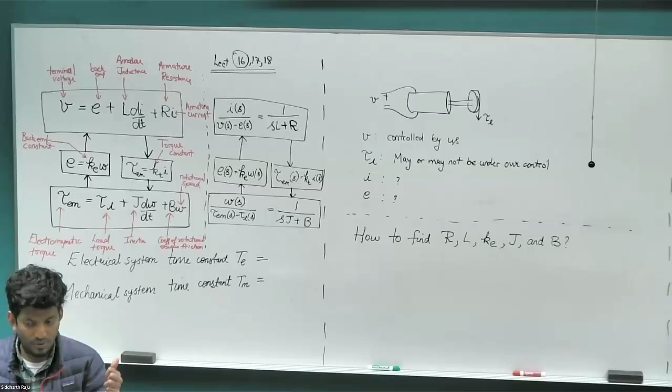So the second thing is there is a project component. We'll start the project starting next week. So we'll meet in the lab in the Keller Hall 3146. I have posted a module on Canvas. If you go to the Canvas page, there should be a new section right on the top, the project. So in this, go to the first link. So there should be the project.

If you go to the first one, meeting time, there should be a link there that you can go and select what time slots are available. Select as many as possible that you're available to meet for the next 3 weeks. Because there are quite a number of students and I want to keep it within 3 sessions. So the more slots, the easier it is to organize. So make sure you fill this in by this Friday. When you submit your homework, make sure you submit this as well. Because I need to go and decide the time slots. And then on Monday, I'll post the time slots that we'll meet at.

Okay. And I also posted another module for internship opportunities and RAs that, as they come up, I'll just let you know. If anybody is interested, just take a look at all three. The first one is particularly very enticing because it's just like a couple of hours of work a week and you get 25% coverage. They'll cover your salary, they'll cover your tuition and everything. And it's basically just helping other people do the lab.

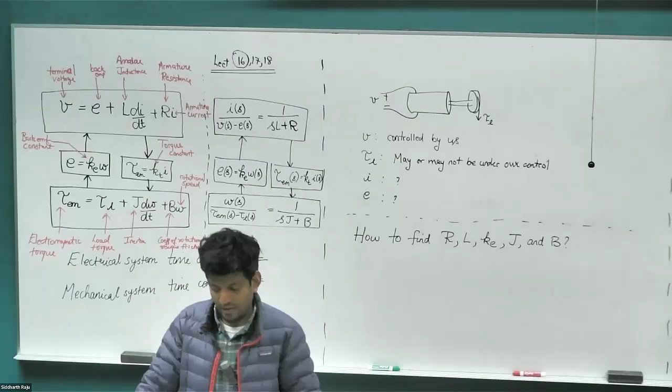With that, let's get started with today's class. So today's class, we're going to be looking at just a quick review of control systems and how we can go ahead and control our motor. And whatever we learn today, we'll be carrying it over for AC motors as well. The concept is very simple.

So before we jump into that, let's quickly just do a review of what we looked at last class. So we modeled our motor as these 4 equations. So we have our electrical system equation, we have our mechanical system equation, and then we have our electromechanical system coupling, which basically is the relationship between speed and the EMF, and then the current and the torque. Right. So we have these 4 equations, and we can represent this in transfer function form as well.

Just take the Laplace transform of this. So V(s) minus E(s) equals (sL plus R) times I(s). So that's just I(s) divided by V(s) minus E(s) equals 1 over (sL plus R). And similarly, you can get the mechanical system transfer function as well. And we can model this whole system in just this transfer function form.

So in the homework, I had asked a couple of questions. One of them is what is the time constant of the electrical system, and the other one is what is the time constant of the mechanical system.

Whenever you model any kind of system, whenever you do MATLAB simulation or any numerical simulation, one of the difficult tasks, other than building the model itself, is choosing the right solver and choosing the right step time so that your system can converge. In a very simple system like this, it's straightforward and obvious what the step time should be. But when the system gets extremely complicated, especially in nonlinear systems, depending on what step time you choose, you can get results which would look stable and correct, but might not be the actually correct results. In a linear system, that won't happen.

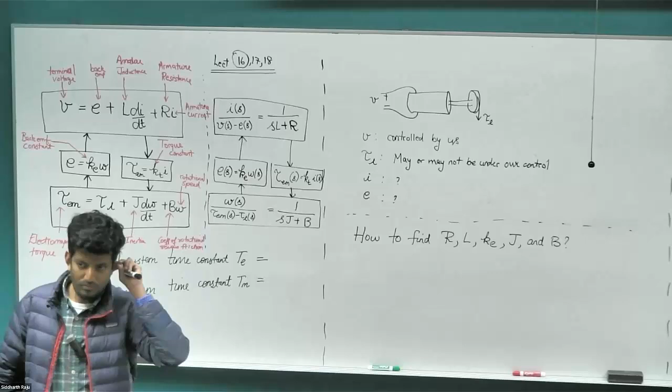From the equation that I have on the right there, what would be the time constant of the electrical system? Anybody? L over R. L over R. Thank you, Hannah. So L divided by R.

Right. So if you look at this transfer function, you can represent this as: take the R term out of the picture, take the L term out, and then you have R by L. This is equal to 1 by tau, a time constant. So our time constant of the electrical system is going to be L by R, and the time constant of the mechanical system is the same thing, J by B.

And if you remember when we had our RL network, the time constant was basically the amount of time it took to reach that 63 point some percent. So that is one time constant, and that was equal to L over R. So for a typical system, for example, in the lab motor, this is in the order of say 5 milliseconds, and this is roughly in the order of around 1 to 2 seconds.

Okay. So given these values, how do you choose your step time for your simulation? Can I choose a step time greater than 5 milliseconds? What would happen if I choose a step time greater than 5 milliseconds? It wouldn't converge. Why wouldn't it converge? Because you're sampling too slow, or you're not getting to see the full potential.

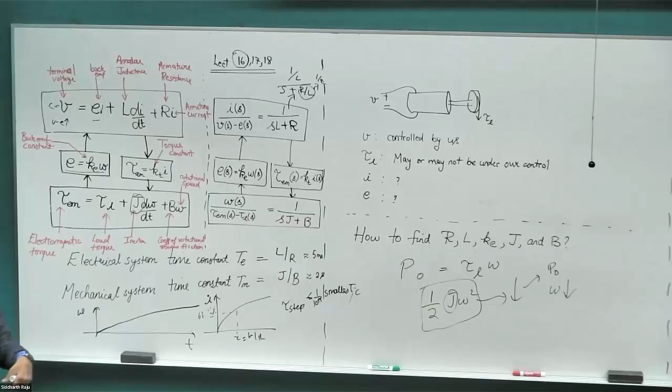Can you tell me how much the inertia energy in the magnetic field will reduce? When the load torque increases, would the energy in the magnetic field reduce or would it go up? We clearly saw the energy in the inertia goes down, right? Once it settles down, it will definitely settle down at a lower speed because of half J omega square.

What is the formula for the energy in the magnetic field? It'll go up because the current increases. Okay, so we have half L I square there. I will have to go up because of this increased load torque, which led to increased electromagnetic torque, which means I went up, which means the final energy in the magnetic field would end up being higher than what it was before. Right? Yeah.

Sure. Does the energy in the magnetic field actually matter for any reason? Do we really care about it, or is it just kind of there? In case of this DC motor, that is just there. It is not particularly useful. It does become a problem when we have that commutation sparking, because let's say we have 6 coils. 1/6 of the coil is commutating, so 1/6 of the magnetic energy would have to go out and reverse in direction, right? So from the arcing point of view, it will be a problem, but otherwise for these operations, it's not an issue. Any other questions?

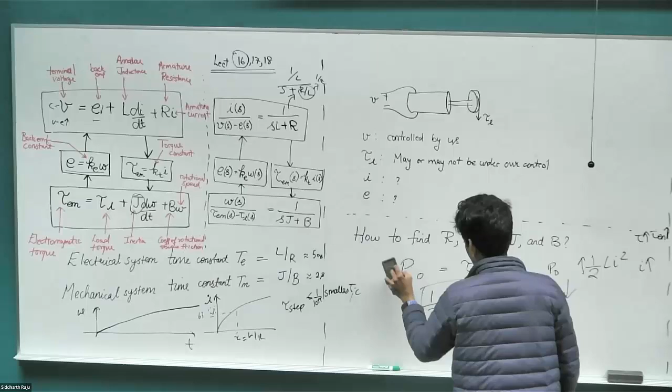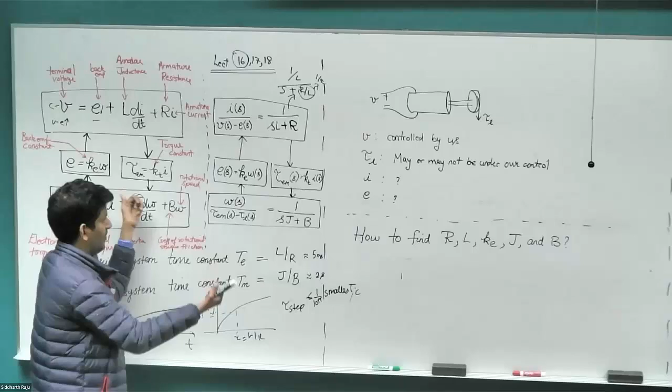Okay. So today's class, let's try and figure out how to find out all of these 5 parameters for our motor. So in our motor, we typically have control of what the output voltage, the terminal voltage is. When I mean terminal voltage, there's nothing special about it, just the terminal wires that are coming out, what voltage we can apply across it. So that's the only one element that we can control.

The other element is the load torque. It may or may not be under our control if it's connected to like an elevator or something that's typically not under our control, number of people getting in and stuff like that. But you can put a constraint of the maximum load torque that can be possible. Or in some cases, those of you who have done the lab already, you would typically clamp the rotor when doing some parameter estimation. In those cases, you can make sure that the load torque is such that it matches whatever the electromagnetic torque is. Right? So there is some variability of control. Sometimes you can, sometimes you can't. So let's say these two variables are something external that we can control for the most part.

Then the other two variables in our equation cannot be controlled. So the I and the E, these two are no longer under our control, as we saw last class or the class before that, right? So these two are uncontrolled. Right, so whenever we want to figure out these parameters, all we can control are the voltage or the load side, the torque side. And then we can only measure what the current and the EMF are.

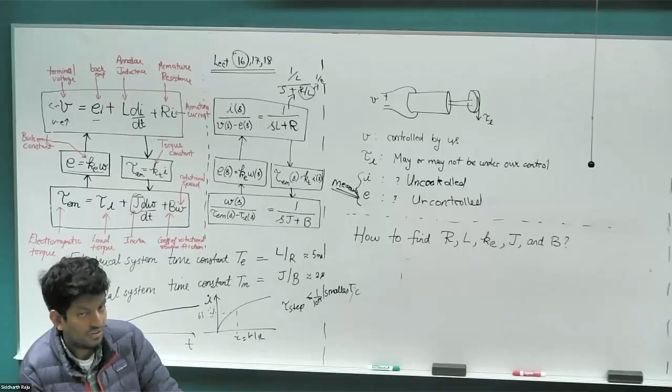And again, going back to the EMF, we can't directly measure it. What can we measure to figure out what the EMF is in a motor? EMF itself is not directly measurable, right? So what else can we measure in a motor so that we can figure out what the EMF is? EMF equals Ke times the speed. Perfect. So to know the EMF, all you need to do is measure the speed, and measuring the speed is pretty easy. So if you can measure the mechanical speed, your EMF is just Ke times the mechanical speed.

And again, this Ke term and KT term, as we derived last couple of lectures before, they are one and the same, if they are both under the same units, right? If one of them is volts per RPM and the other one is Newton meter per amps.

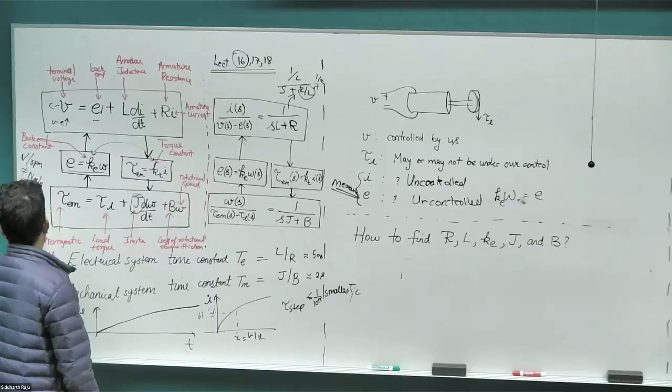So if you have volts per RPM and then the other one is Newton meter per amp, they definitely won't be equal, because the SI unit for that would be volt second per radian, right? Because this would be radians per second and this would be voltage. So volt second per radians, and then if this is Newton meter per ampere, then these would match.

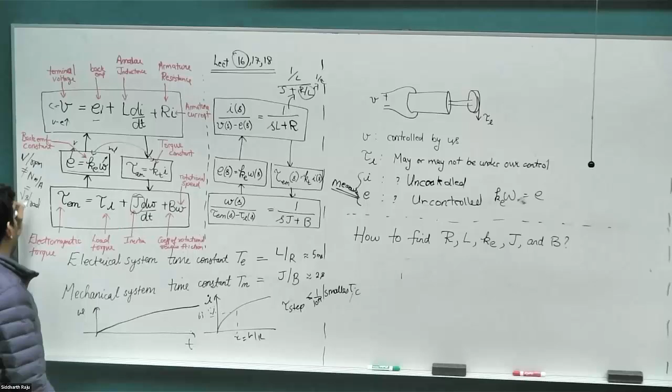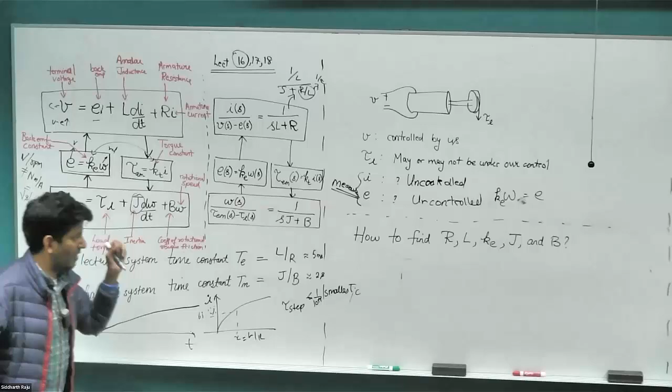Right? But typically in the data sheets, when you see Ke and KT, they would be different values, because people like to give this in terms of pounds or something, and this one in terms of Newton meter per ampere. So they're completely different unit bases. So the values might differ, but if you convert them to SI units, they would exactly match up, right? So in our course, whenever I use Ke and KT interchangeably, they mean one and the same.

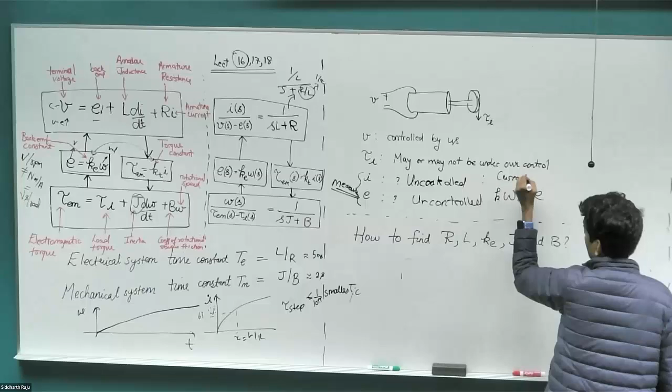It's just some K. So once we measure the speed, we can directly figure out what the EMF is going to be. Current, that is something that we can directly measure using some kind of current sensor. So this is a measurable entity as well. Okay. What is the one scenario in which I can actually figure out what the EMF is? One operating point.

KE and KT are like attributes of the motor, so will those be given to us, or is that ever something we have to calculate? It depends. So in the project, I've asked you to calculate the KE value. I give you the motor winding distribution, and then I ask you to figure out what the KE value is going to be, right? If you look at a data sheet, typically they'll give you that value. Sometimes you'll have motors that you don't have the data sheet for, or the KE value is not known correctly, right? In those cases, we'll estimate the value by doing some experiments. So depending on the situation, we can either get it from the data sheet, or we need to estimate it, or if you have the winding diagram, you can compute it, right?

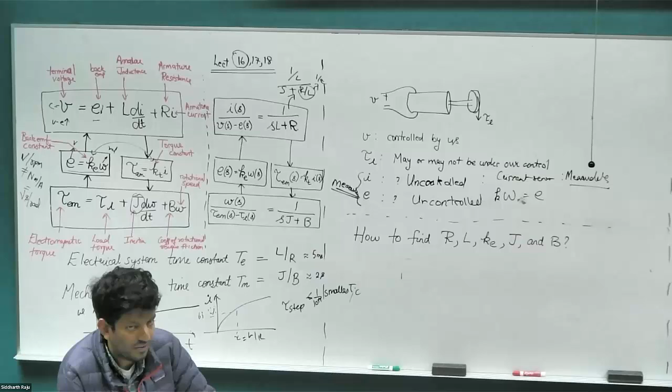All right, so what is the one situation under which I can actually measure the EMF? Is it steady state of the omega? Steady state of omega, correct? So I still can't directly measure EMF, right? Even in the steady state of omega, I take the omega value and figure out what E is. And this relationship is not a steady state relationship. If I know omega, even if the omega is changing, then the EMF will change exactly like this, right? Just scaled by some scale. So none of these equations are steady state equations.

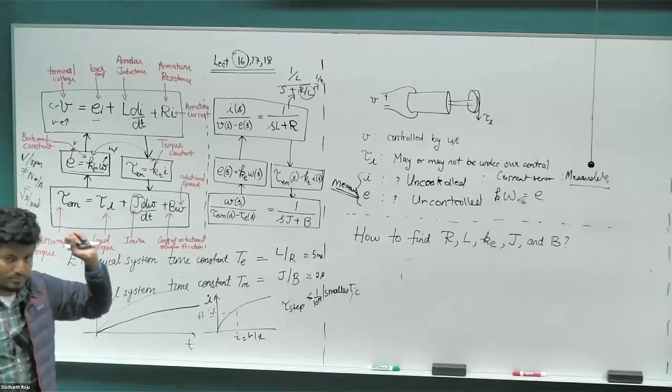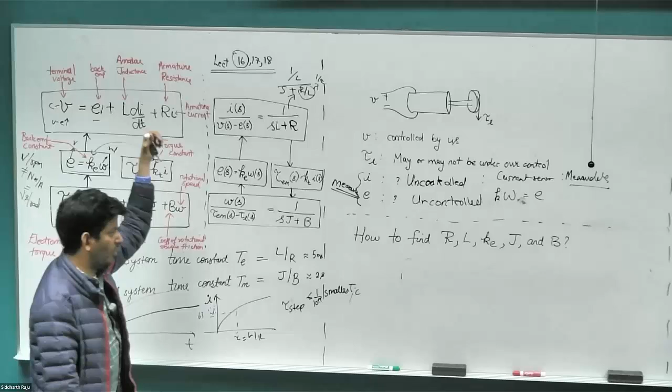There's no current. Could you measure E because it's just equal to V? Perfect. So when there is no current flowing in the system, this term is 0, this term is 0, V is directly equal to E. Right? So if I have a motor, can you give me a setup where there will be no current in a motor? But there will be a voltage across the motor?

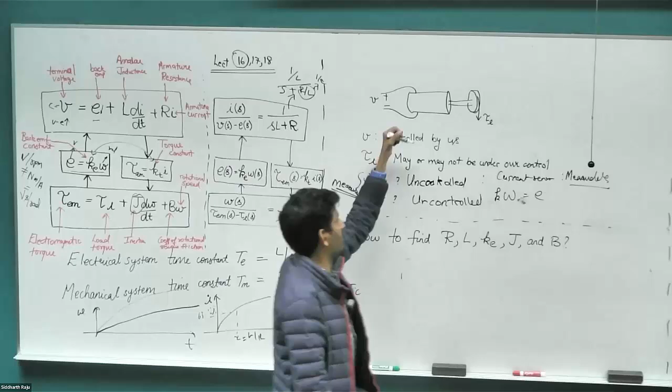Is it operating as a motor in that case? What is it operating as? A generator? Yep, it's a generator, right? If you take energy out of it, it becomes a generator, but basically you have some other system connected here. Some other motor or water, so some water flowing past some blades, creating some energy. So the system is freely rotating, and then this is going to create an EMF, right? Because it's rotating, it's going to create an EMF. That EMF is going to appear as a voltage if there is no current, if there is nothing connected to the outside world. So this is one way we can directly estimate the KE value.

So we already have our answer there for how we can figure out KE. Take your motor, connect it to another motor, and spin this other motor while keeping this terminal open. And figure out the speed at which it's rotating, measure the voltage. Your voltage divided by your omega, that is going to be your KE value. Again, for open circuit condition. Open circuit motor. So in that case, V is equal to E. So that's why we're able to make this relationship.

Right? So, all right. So now let's go ahead and estimate the rest of the parameters. Can somebody tell me how you'll estimate the resistance? You don't have to think too hard. It's a very simple answer.

Yeah, Thomas. Put the voltage on it and measure the current. Perfect. So put a voltage on it, measure the current. That's exactly what a multimeter is going to do for you. Just take a multimeter and measure what the value is going to be, and it's going to give you the resistance. There are a couple of problems with doing this method. I'll get to that in a second.

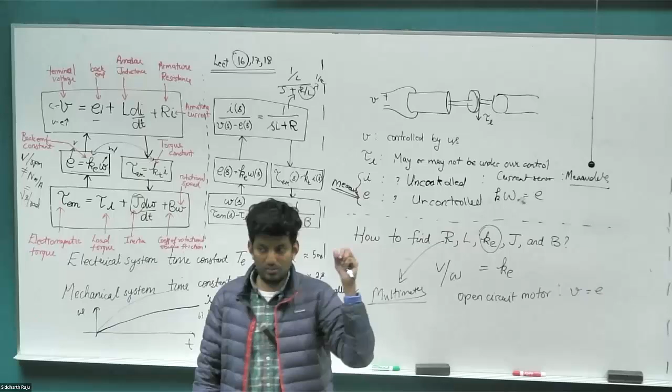But once we have the resistance, can somebody tell me how we will measure the inductance? How can you get the inductance of this circuit? Again, the answer is already on the board. Yeah, from the time constant, fantastic. What was your name again? Sorry, Olivia. Olivia.

So we already have the diagram there. We apply a step in the voltage. Let's say I apply a step voltage of 10 volts. So I have the voltage at 0, and then at time t equal to 0, it goes to 10 volts. And let's say the resistance is 1 ohm. What is going to be the steady state current? 10 amperes. So the steady state current is going to be 10 amperes.

And if I figure out where the current goes to, let's say 6.3 amperes, whatever the value comes to, 1 minus 1 by e times 100% of 10, then wherever that value comes out to, if I stop and look at the time, that is going to be equal to L by R, question mark. It may not be, as we'll see. But if that were the case, then I know already R, so I can figure out L from this value. There's a very big problem with this. Can somebody tell me what the issue is going to be?

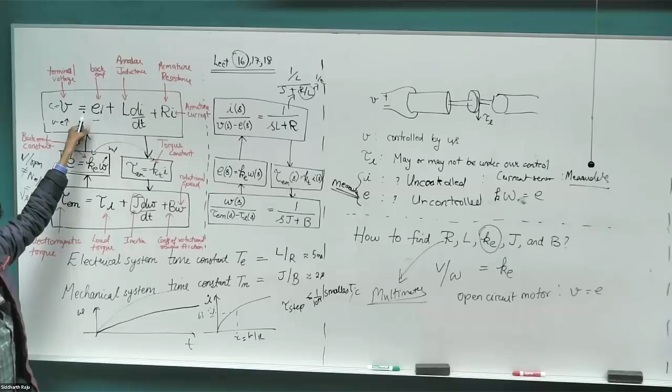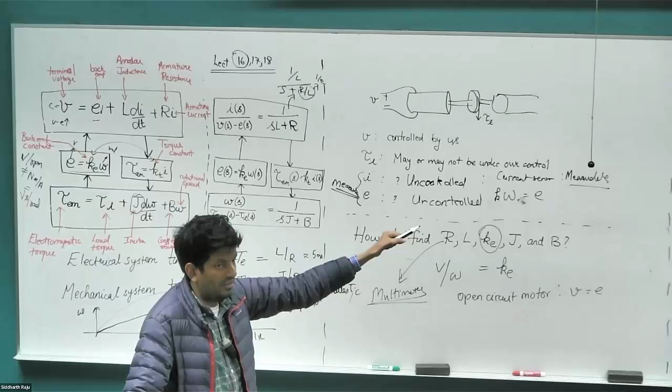It's a very good answer. But there's a mistake in that model. Going back to our equation for the diagram that I've drawn, V equals L di by dt plus Ri. It has completely ignored the EMF term E. As the current starts to increase, there is going to be acceleration because the torque is increasing, then the speed is going to increase, then the EMF term is going to creep in. So when I take a DC motor and apply a step voltage, that is not the waveform it's going to look like. Because it's not just V across an L and an R, it's V minus E across L and an R. Even though V is a constant, E is a varying term. So the picture is far more complicated than what I've drawn there.

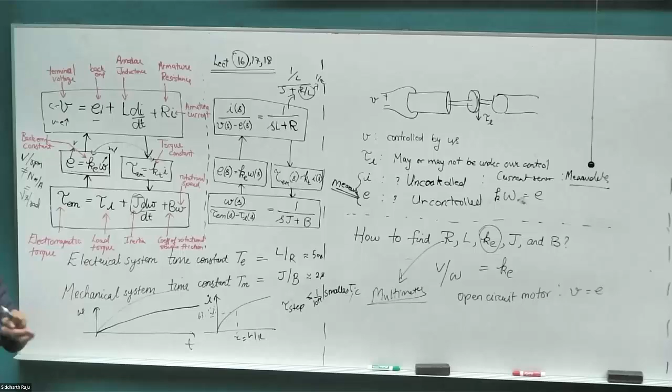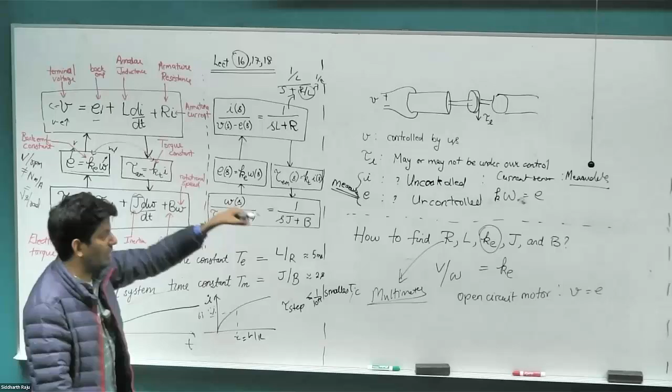But what can I do to ensure that that's the shape in which the current would look like? There's something I can do in the motor to ensure that that's how the waveform would look like. What can I do? Keeping it from spinning. Perfect. So if I somehow hold on to the rotor, I could use a mechanical clamp of some sort. If it's a small enough motor, I can hold it by hand and ensure that the rotor is not rotating. Then the EMF term can be ensured to be 0, and then that is the waveform that I'll definitely get for the current. And then I can go ahead and do all of this analysis.

So there is quite a big problem here. We are putting a constraint that the speed has to be 0, which is not always possible. If you have a very high power motor, you cannot typically put a clamp on the motor. It will rip the clamp apart if you try to hold it by hand. I don't want to see what's going to happen. So it's not always a feasible solution. So what else can we do? How else can we estimate the inductance in the case where we cannot clamp the motor so that the speed remains 0? What else can we do?

When I introduced this diagram in the third or fourth lecture, I gave another interpretation for time constant. Does anybody remember what was the other interpretation for time constant? So if the current were to rise at the same speed, at time t equal to 0, let's say it started to rise.

And if it continued to rise at the same linear speed at which it started off rising... because of the resistance component, it starts to kind of narrow down. But if it was just a purely inductive network, this would have kept on increasing forever, right? And the time it would have taken to reach the steady state value in this inductive resistive network is the value of the time constant, right?

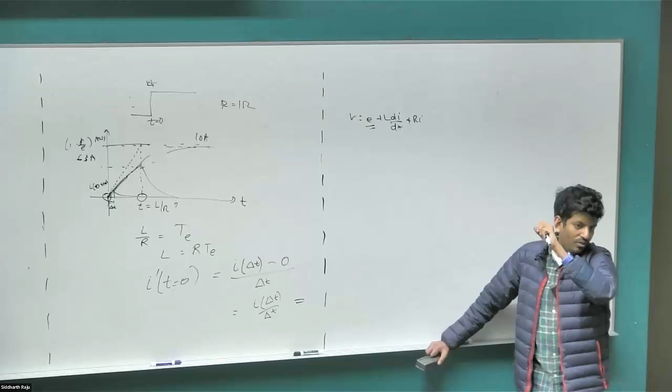Go back to our electrical system equation, right? So we have V equal to E plus L di by dt plus Ri. In our current setup, what is the value of E? 0. So this term goes away. What is the value of Ri going to be? Approximately, what is it going to be? 0. Because the current is again very small.

The current is very small and the delta T is very small. So the division of small current and small delta T becomes appreciably large. But the current magnitude itself is quite small. So this term is negligibly 0. So what is the slope? That is di by dt. If delta T tends to 0, the limit becomes the differential. Right? So our slope is equal to V divided by L.

We know what voltage we applied. We applied 10 volts. We know what di by dt is from our measurement. Then we can get the inductance L. L equal to V divided by di by dt. Right? So we could have looked at the same thing the other way around as well.

From our definition, we said our time constant is equal to the time it takes for the slope to reach the steady state value. So let's say it takes some time t. If I multiply this time t by whatever slope I got, which is I of delta t divided by delta t, that must be equal to whatever the steady state current would have been. And what was the steady state current? That was equal to V divided by R. And what is my time constant? It's L divided by R. R cancels, we get the same formula again, however you look at it. Again, this term tends towards di by dt as delta t tends towards 0.

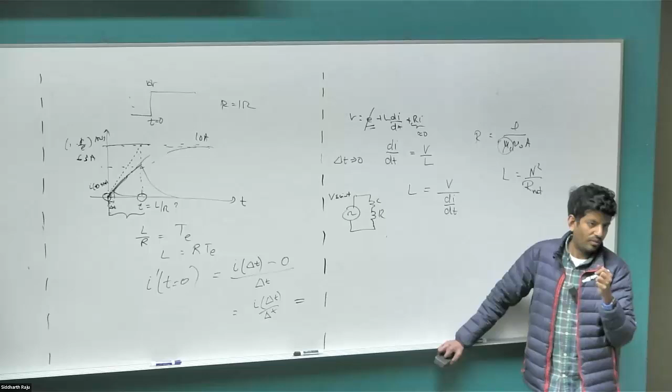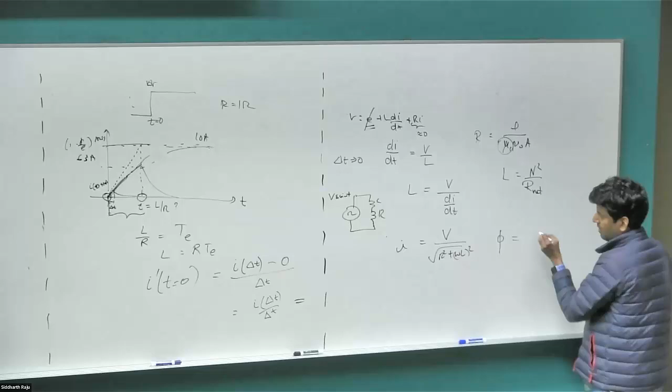Pretty straightforward. So we just have our current magnitude is going to be V magnitude divided by square root of R square plus omega L square. And the angle of the current is going to be tan inverse of omega L by R. This expression is also something that we have seen before when we did our phasor analysis. Right? So now what we can do is we apply some sinusoidal voltage. In our current measurement, we need to make two readings. One is the time at which the current goes to 0 compared to when the voltage was 0. And what would that give us? That would give the phase angle.

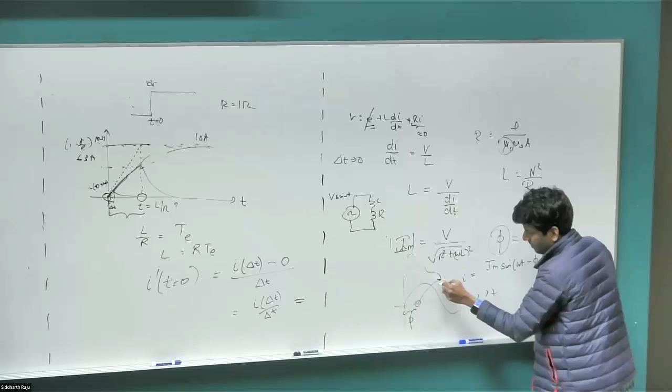Right? Because if this is V sine omega t, then the current is just V divided by whatever this impedance is. So let me call this I magnitude. Right? So magnitude Im sine of omega t minus phi. So it's just going to be phase lagging, assuming time in this direction. And the magnitude itself is this value that I have here. So all I have to do is look at the current measurement, see where it crossed the 0 compared to the voltage crossing, and then see what the magnitude of this is. I have two values and two unknowns, L and R. I can solve two variables, pretty straightforward, right? So I don't need to know resistance. If I inject sinusoidal voltage and measure the sinusoidal current, I can figure out what the R and L values are. There is absolutely no problem putting a sinusoidal voltage into a DC motor, as we'll see when we do the lab experiment. Right?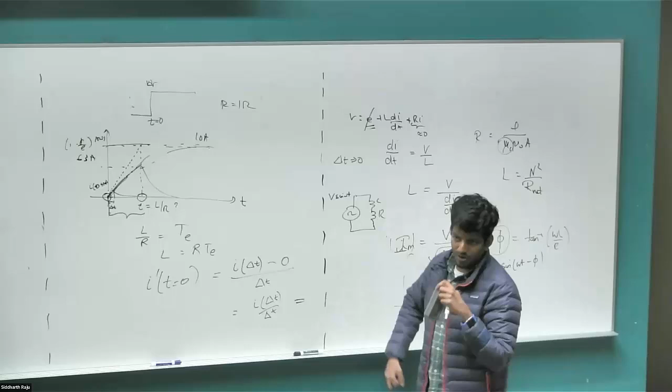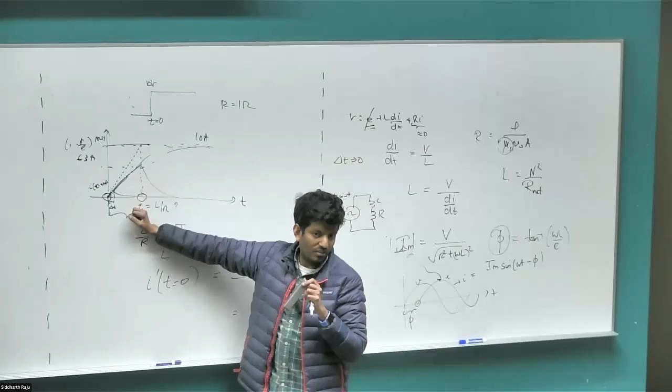But what is the problem with this? When Olivia gave the answer that we wait for one time constant and look at what the current is, what was the problem with that? Why did we do this tiny di by dt term instead of using the time constant method? EMF is not 0. EMF is not 0 because the motor would start spinning. We would have the same problem here. Right? If we apply some sinusoidal voltage, you'll see the speed will go sinusoidally as well. Right? But what can I do to address that?

I don't want to make the voltage too small because the current would be too small. Then I can't differentiate between the peak and the 0 crossing. The measurement will all get pretty bad because of the noise that we have. So what else can I do? I want to keep the sinusoidal thing because I can get both pieces of information, but I don't want the rotor to rotate.

So try to get an intuitive feel for what's going on here. When we did our first power electronics course, the review, I showed you the lamp blinking experiment. You saw the blinking only up to a certain frequency. Once I went to very high frequency, you completely stop seeing the blinking. I can do the same thing here. If I make this voltage frequency extremely large, then the motor cannot see the variation in the voltage. For it, it's just going to look like an average value.

What is the average of that sine wave? 0. So if I take this voltage but make the frequency extremely large, then during the first half, the motor will try to spin in the positive direction. Next half, it will rotate in the negative. But it happens so fast that it will just wiggle around in the same place. We'll see that in the lab, it won't effectively rotate to create a high enough speed that the EMF starts to interfere. So we can still treat this as an RL network.

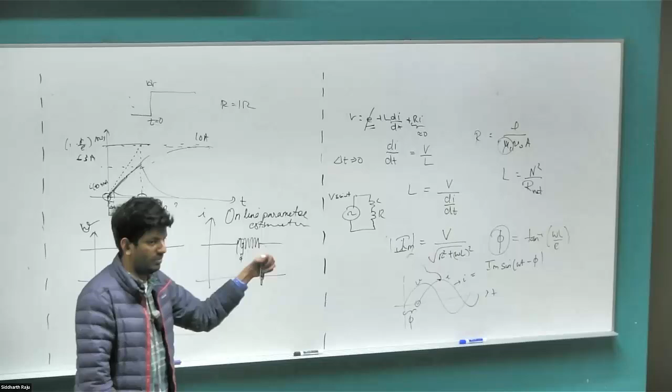In the lab, we don't do this, but for most of the motors deployed in the industry, at least for high performance, they do this. In electric vehicles and similar applications, they inject high frequency components so that the inductance and the resistance are updated continuously so that you can tune your controller. When we look at how to tune the controller, we'll see that the performance is closely linked to what the R and L values are. If you assume some R and L and the value changes over time and you still have the same old controller, your performance will start to deteriorate. So you want to keep updating it online. We have this advantage when we inject this high frequency component.

Anybody got any questions?

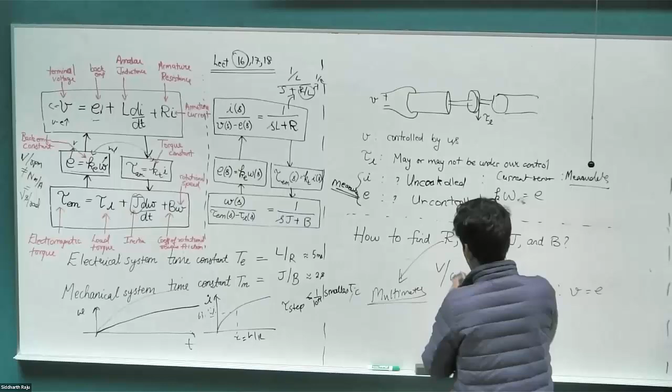Right. So let's go back. We have already seen how to figure out R. We have seen L, we have seen K. Let's look at J and B. Can you tell me how we can figure out B? Let's again not worry about the online estimation method. For mechanical, it gets a little bit trickier for online estimation.

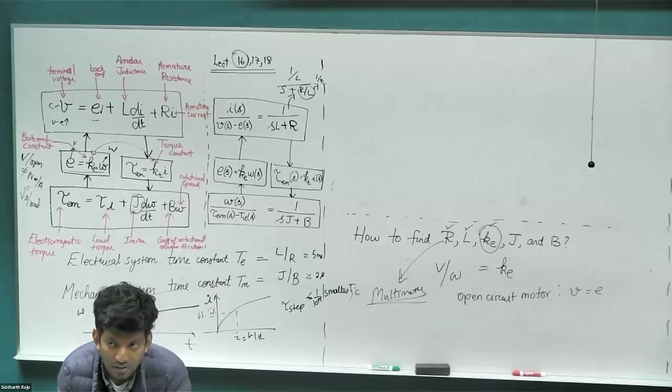Yep, exactly. Yeah, but for that I need to know J and the time constant, right? I don't know either of it. I don't know this term, I don't know this term. Let's say I want to start off with measuring just what B alone is. Once I know B, then I can use the time constant method to figure out what J is. How do we figure out B?

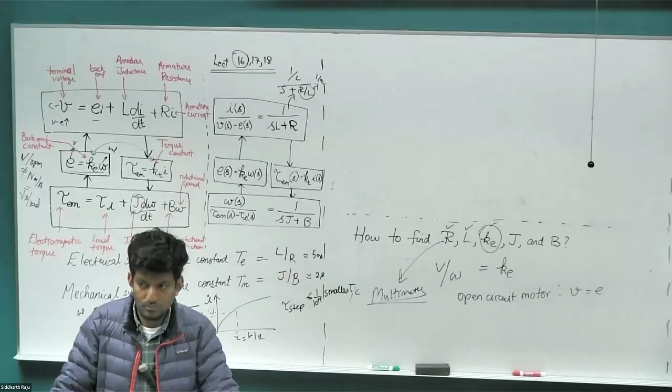Well, we can apply different voltages to the motor. It's going to cause different currents. Take a reading of the currents. Then we know what the electromagnetic torque is. Let's assume we are not applying any load torque. We are not loading this motor at all. We are letting it spin freely. The motor is not coupled to anything else. It's just going to rotate freely.

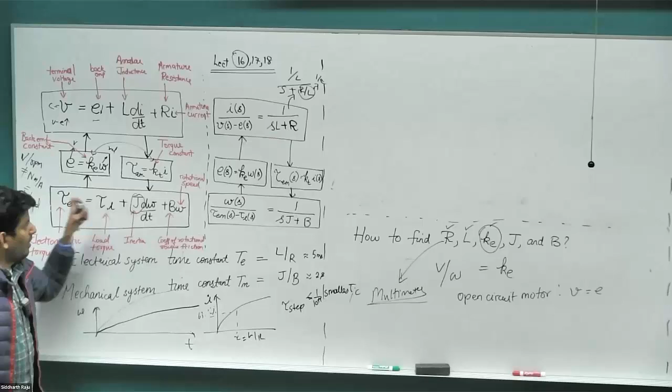What is going to be at steady state? This term is going to go to 0. So our electromagnetic torque is directly equal to B omega. Our electromagnetic torque itself was directly equal to the current times the KT. So I apply some V, let it reach steady state, and then measure current.

Once I have current, our electromagnetic torque is equal to KT times I, and this must be equal to, at steady state, well, the load torque term, which is 0, we are not putting any load torque. This is our intentional design. And J d omega by dt. This term is 0 at steady state. That is the definition of DC steady state. All the differential terms go to 0. Only the term that remains is B omega.

So for B, we can again measure omega. It's just KT times I divided by omega. So with that, we have our frictional coefficient B in our motor. How do we estimate J? So, Zach already gave the answer: if we know the time constant, and we know B now, we can get J.

Now the question is, how do we get the mechanical time constant? What can we do? Go to 10 amp steady state and go to 0 amp with a step. Perfect. So we can start off at a known current. We can do the reverse of that 1 by SJ plus B thing. So let's say we are running at some constant speed. We are already putting some torque.

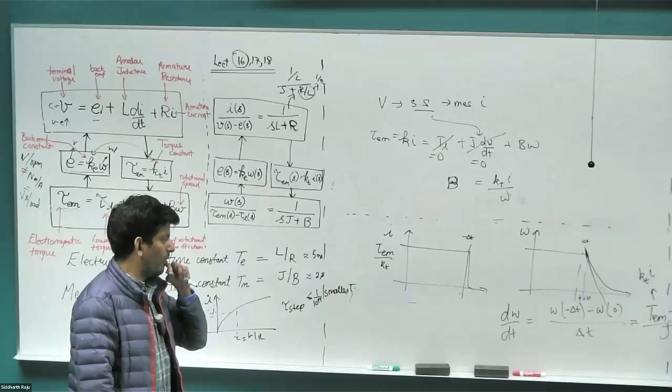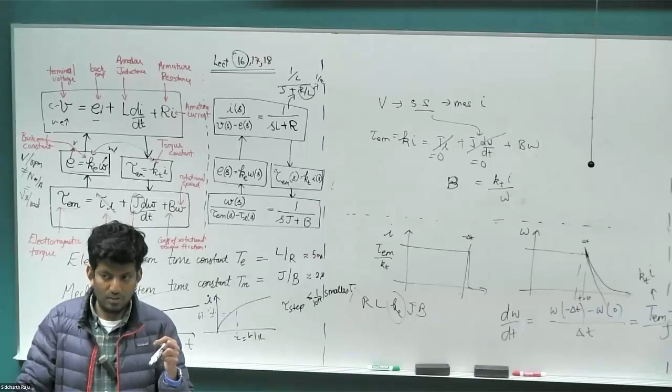Right? So this is how you'd end up estimating all the 5 parameters. So here I estimated R, L, K, J, and B. How do I estimate KT? Do I need to estimate KT? No, right? Because K is already known, K and KT are the same. Okay. Any questions so far on how we estimate the motor parameters?

Why do we need to do it that way where it's like on and then we turn it off? Like why couldn't we just apply a current spike? Oh, we can. So the problem with applying the current spike is the electrical system keeps changing with the mechanical system. Right? And in the previous case, we can assume that the mechanical system can't catch up with the electrical system. So the mechanical system didn't interfere with the electrical model. But the electrical system actually operates way faster than the mechanical system. So we can't do the reverse assumption.

So if our electrical system is changing, we cannot ignore those changes when we analyze the mechanical system. So we need to ensure that the current in the electrical system has gone to 0. Right? Before we can do this analysis. As soon as I turn off the voltage, the current wouldn't go zero like this, right? Because we have inductance there. But it goes to zero extremely fast compared to the mechanical system that I can more or less assume this to be a straight vertical drop. And then once this electrical system is out of the picture, then I can start analyzing the mechanical system as if it's the only system available.

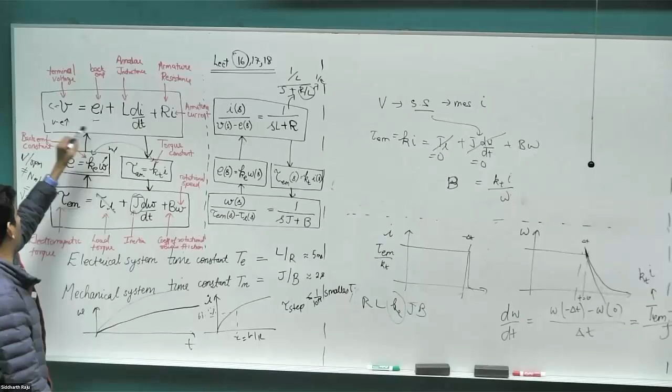All right, but I can't do that analysis when the current is increasing on the turn on time, right? Because the current is gradually building up, all of these terms are varying. So this is definitely interacting with the system at that point, right? Okay, any other questions?

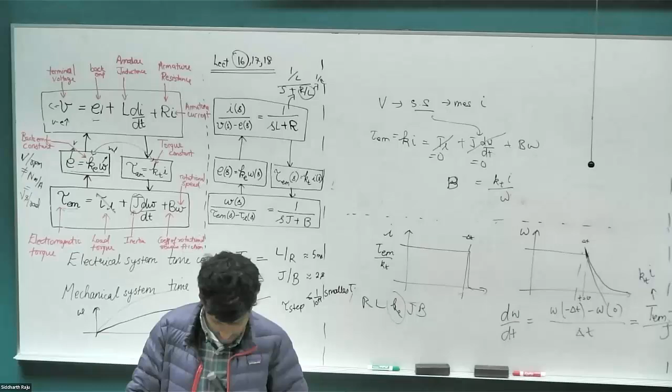Okay, so with that, let's look at a couple of examples on how to design a controller in the frequency domain. So what we have is, we have our motor. The load torque of the motor is controlled by some other external thing that we have no say over. If it is a generator, it's the opposite, right? So let me draw what we can control. We can control the voltage of the motor and the load torque is whatever it is. If it is a generator, it's the opposite. We control the torque going into the generator and the voltage is whatever it comes out to be.

Right? We will then have some kind of closed loop control to figure out whether the voltage is the correct value that you want it to be, and then adjust some prime mover mechanism to adjust the torque and so on. But let's consider just the motor case where we control the voltage, load torque is whatever it is, and the motor goes and settles to some speed, omega. Now we already saw a bunch of problems. As we start to increase the load torque, even for a given voltage, the omega starts to change. And then the motor parameters change, as the motor heats up, as the current increases, core saturates, and then we haven't even looked at the B and the J terms changing, right?

B term can change. Let's say you have some kind of liquid, a non-Newtonian fluid that you're mixing, or let's make it simple. Let's say you have a cement mixer. As the cement thickens, the friction of the fluid starts to increase. So we can have mechanical systems where B actively changes as the system operates. Can somebody give me an example where J, inertia, will change as the system keeps operating? Yep. If the radius of whatever the load is changes. All right, can you give me an example?

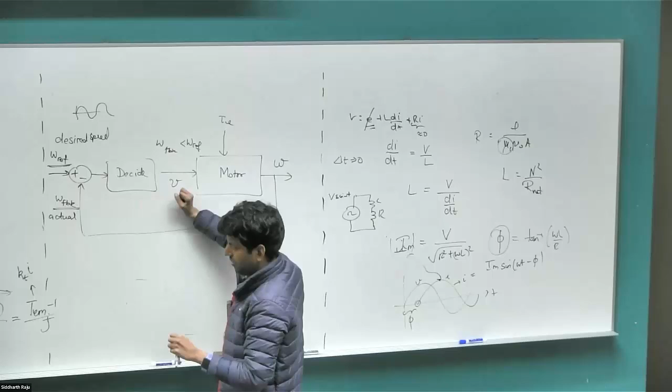And the opposite, if we are rotating at a faster speed than what we want to get to, we know intuitively now, not even intuitively, from the math of it as well, that the speed has to go down. Sorry, the voltage has to go down if the speed has to go down. Right? So whatever the decision block here is basically going to do is this function, where depending on what the error is here, it's going to make some decision and decide what the voltage is going to be. Okay.

Let's look at a real world example. So let's say you have a car. That is your plant. In our first case, the plant was our motor. And we measure some speed in the speedometer. And our brain takes some action while we are driving. We want to go to, let's say, 60 miles per hour on a 60 mile per hour road. And we look at what the actual speed is. And we've got to make some decision here to figure out how much we press the gas pedal.

So let's start out with a very simple system where I just have some kind of proportional gain. Let's say this gain is some number, doesn't matter. Let me call it Kp for proportional. Okay, a proportional controller, a P controller. So we feed back, this is coming from the speedometer. This is coming from the speed limit. And then we make some decision.

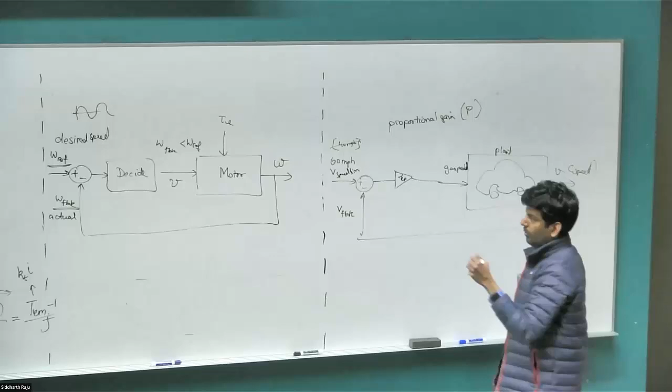So very simple. If I want to go to 60 miles per hour and my speed is currently 40 miles per hour, then I know I need to increase the force I apply on the gas pedal, increase the gas so that the car can accelerate and go to the speed that I want it to go to. If I'm very close to 60 miles per hour, let's say it's a 60 miles per hour speed limit and I'm already at 58, I don't want to press my gas pedal as hard as before, right? So the amount I press the gas pedal is proportional to the error that I'm observing there.

If the error is large, I need to press the gas pedal very hard so that I can create more force on the engine, and then that can accelerate the car. If the error is very small, I don't want to accelerate too much because I would end up overshooting. And the opposite applies as well. If I'm going at 60 miles per hour and the speed limit changes to 40, my reference speed now changes to 40, but my feedback currently is 60. So I would start to take my foot off the pedal so that the speed starts to come down.

If it was an electric car, when you take the pedal off, it starts to regenerate energy from the rotor so that you can take the speed down much, much faster. In the case of a gas engine, there is nothing you can do to recover the energy back. It's just lost in the friction, or you can put a brake and then accelerate the rate at which it starts to fall down. Right? Will this system work in real life though?

Right? Anybody says it won't work? Okay, Christopher, what is the problem?

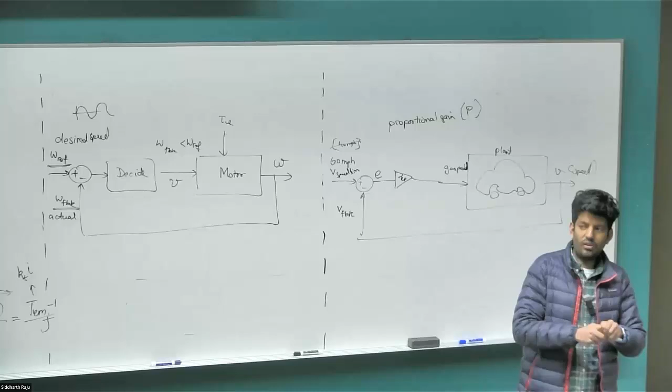Well, this is just one source of error. You could have noise injected into your signal that screws up the gas pedal and creates oscillations. Okay, let's say this is a system where there is no noise. I'm saying just within the proportional gain, will our system work?

Ganesh, do you have an answer? No. No? Yeah. What will happen? Let's say I want to go at 60 miles per hour and I reach 60 miles per hour. Error goes to 0. Then this tells me that I don't need to apply any force on the gas pedal. From experience, all of you have driven, doesn't matter if it's car or bike or whatever. Can you remove the leg from the gas pedal and expect the speed to remain constant? No, right? So there is something missing in the system.

Once the error goes to 0, we know from experience that we still need to apply some force on the gas so that there is motion that goes on at the same speed. So some information is missing. In what hypothetical world would I not need to apply any more force on the gas once the speed matches? There's no friction on the car. No friction, perfect. So when there is no loss in the system, then you can remove your leg and the system will go at whatever speed it was before. In a real world system, that is not the case.

So I need to include something else in this model, some other control block that can ensure that even if the error is 0, the output is non-zero. Because that's what our brain is doing. Our brain is doing nothing special. It is just looking at the error, and from experience, we have created a neural map implementing this very simple function. Even after our error goes to 0, we know the pedal needs to be pressed. So what linear continuous system can I use to make sure that happens? Even if the input goes to 0, what operation would ensure that the output does not go to 0?

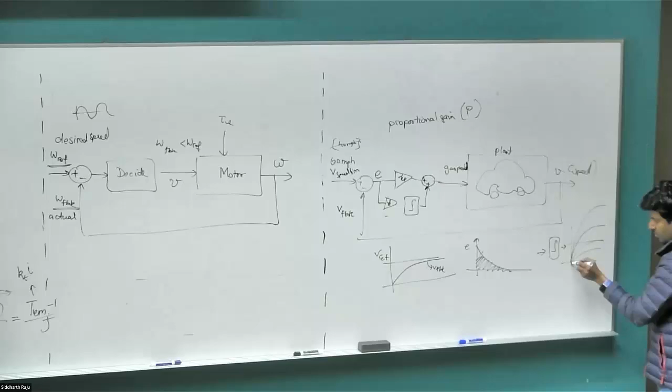So if I replace this with an integral block, we can ensure this. And let me add a gain as well. Why just integrate, if I can increase the scaling factor of this? Why just have this waveform? I can also have a waveform that's much larger, or even smaller. I'm just going to give that element of control variability for me, and we'll later see why I'm introducing that variability. I could have directly taken the error and integrated, but sometimes it might make the system stable, sometimes unstable, but I can choose a correct K value so that the system has a response just the way I want it to. So this is called an integral gain, or an I controller, and the combined thing is called the PI controller.

Right? Quite simple control. This is what we're going to be using throughout the rest of the course. And a couple of interesting things.

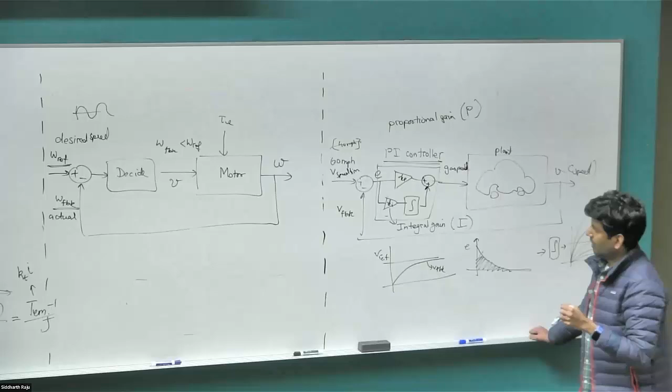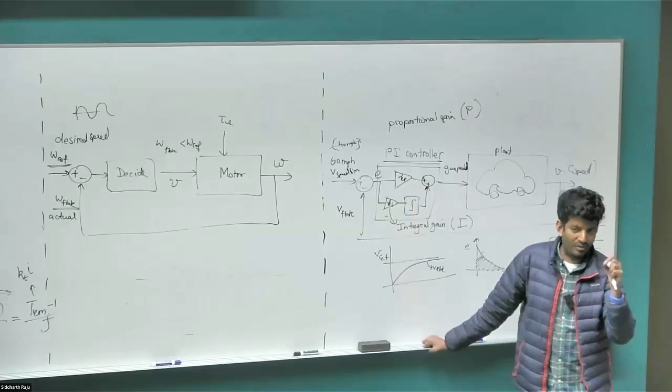What happens if I increase the KP value in the real world? What would you call a driver who has a very large KP value in their head? What was it? Lead foot, could you repeat it? A lead foot, or basically a rash driver, right? They see a tiny difference in the speed and you just hit the gas pedal pretty loud. And as you age, hopefully this KP value starts to come down in your head, right? That's all that happens in your brain, nothing too complicated.

So we want to intentionally create some values here and see what the responses are going to be. But before we do that, let's quickly go to the frequency domain, because how we design the KP, KI values will determine how our response is going to be.

So if your KP gets too large, you know from experience that your response, let's say you're sitting with someone who drives extremely rash, versus you're sitting in the car with your grandpa. If the speed limit is 60 and you're starting off at 40, your friend's response would probably look like this, while your grandpa's would probably look more measured. Right? So the difference is basically the KP that's causing the difference in the response. One is just a more measured experience, and the other one is just a lack of experience in some sense.

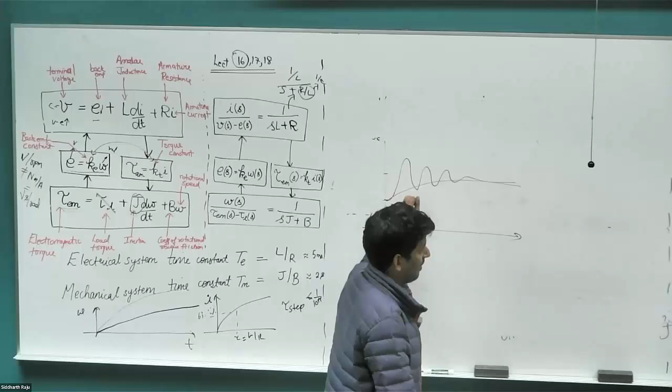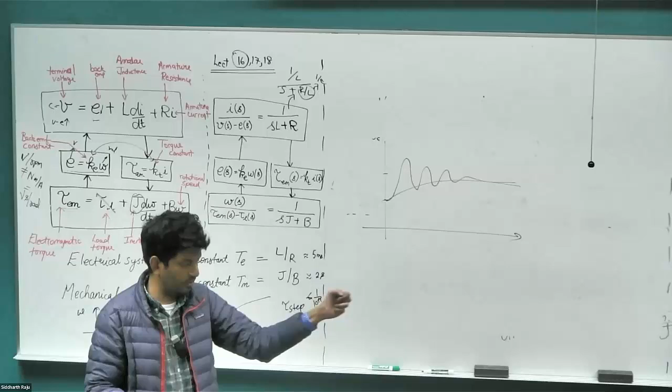Right? So sometimes this is very useful if you're in a hurry. Sometimes this is very useful if you don't want to damage your car. In the real world also the same thing happens. When you have a robotic arm application, right? You want to go from say some angle 30 degrees to 120 degrees. You don't want your assembly arm in your manufacturing plant to swing around, because there could be a person on the other side, there could be some equipment on the other side that could be damaged, right? So a slower response is okay if it doesn't overshoot.

But in another application like an EV application, say Tesla boasts that they can go from 0 to 60 in less than a couple of seconds, that boasting factor has a lot of value. They don't want this kind of response, right? If you set a limit of 60 and your car goes to 62 miles per hour, nobody is going to penalize you for it, right? But if it takes a long time to get to the 60, people are going to penalize you for it. So they would have this kind of response in their auto driving system, where they would exceed a little bit, but the settling would make the user feel as if it got to the settling point much sooner than the other response. So we want to have different kinds of controls for KP, KI values so that we can get any kind of response that we need based on the applications that we have.

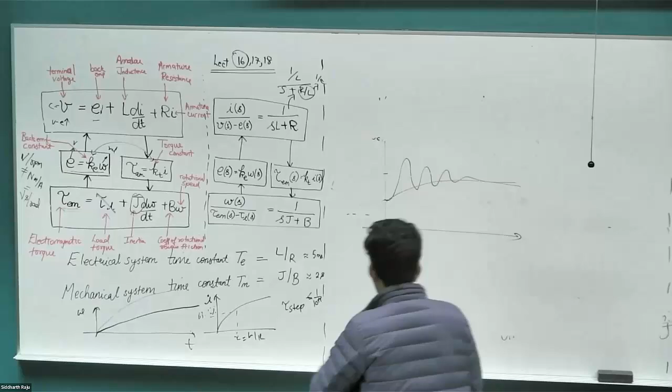So to do that, we will be looking at the frequency domain, which we will do on Friday. So for today, let's just do a quick refresher.

Let's say I have a transfer function G of S. How do you figure out if the transfer function is stable or unstable? If the poles are on the left half plane. Right, so the poles are on the left half of the plane.

So let's say this has some numerator, some denominator. So whatever the solution of this characteristic equation is. Okay, so some denominator of S, set that to 0, solve for the equation. Let's say it comes out to S plus alpha, S plus beta, S plus gamma equal to 0. And then of course the poles are S equal to minus alpha, minus beta, minus gamma. And if these alpha, beta, gamma terms are positive, or in other words, the poles are negative. So the solutions of the characteristic equation of the denominator are called the poles.

If you do the same solution for the numerator of S equal to 0, whatever comes out would be called the zeros. Right? So if the poles, if this negative alpha term, negative beta term, negative gamma term are all negative, that is alpha, beta, gamma are positive themselves, then the solutions are stable. Then our system is called stable, otherwise the system is unstable. Why should they be negative?

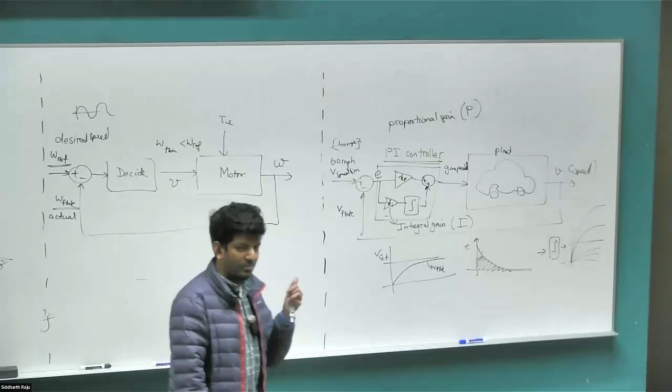Then why are we designing a control system? The system is always stable to begin with. What are we trying to stabilize? When we have this inverted pendulum example, we are actually trying to stabilize the inverted pendulum. Left to its own, it would fall down. If you don't do the proper control, the system is quite unstable. So there, the purpose of the control system was to stabilize it.

What is the purpose of our control system? The system is already stable to begin with. What are we designing the control system for? Yep, Christopher. Aren't you trying to target a specific torque or speed? So our purpose is not to stabilize the system. Our purpose is to get to a particular speed that we wanted to get to. So our intent is different compared to where we actually want to stabilize the system. Okay.

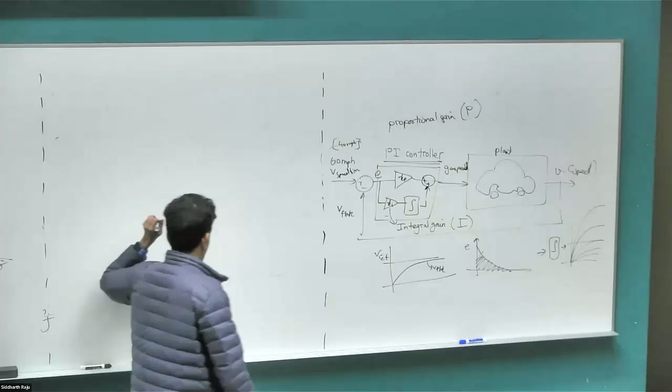So the idea is the system is going to be stable if the poles are on the left hand side of the S plane. The zeros themselves do not matter for stability. They would cause what's called a phase delay, but otherwise it won't affect too much. In our case, we won't experience a zero in the control system that we have, so we're not going to worry about it. Right, so let's look at a couple of examples.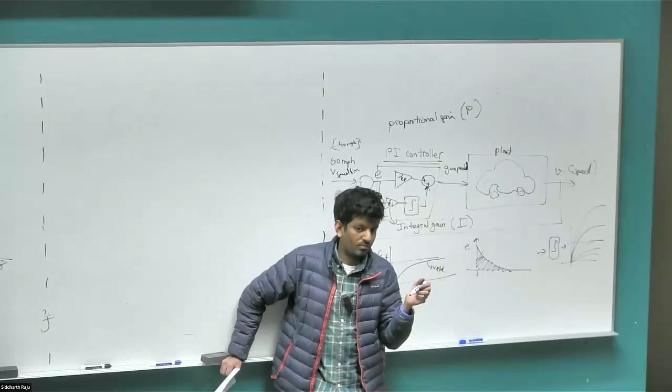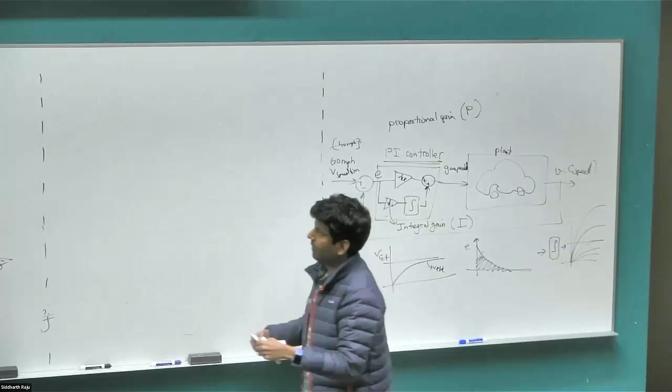If I have an open loop system that's unstable, can I stabilize it using closed loop? Right, so that's what the inverted pendulum case is. You can stabilize it. When you balance an inverted pendulum in hand, your eye is basically the closed loop doing the stabilization. So let's say we have a system G of s equal to 4 divided by s minus 1. This is clearly unstable because the pole is on the right side. Our time expression is going to be e power 1t, which exponentially blows up with time.

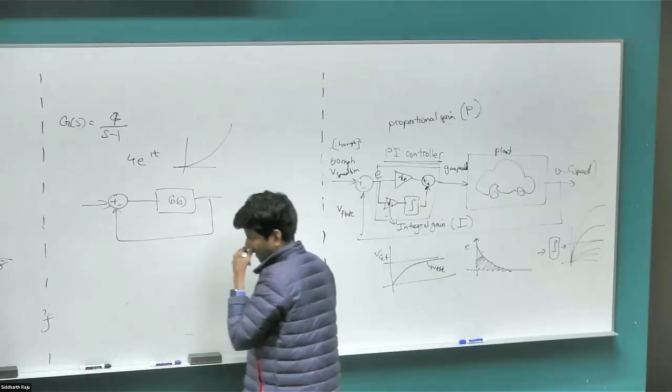So the way we can stabilize it is to put this G of s in a simple closed loop and close the loop. I can use a transfer function, some kind of control system, on the feedback as well, which we typically don't. It will typically be some gain blocks, but in this case, we don't even need that. What will be the closed loop transfer function for this? That's basically output divided by input. What would that be for the system? Very simple transfer function.

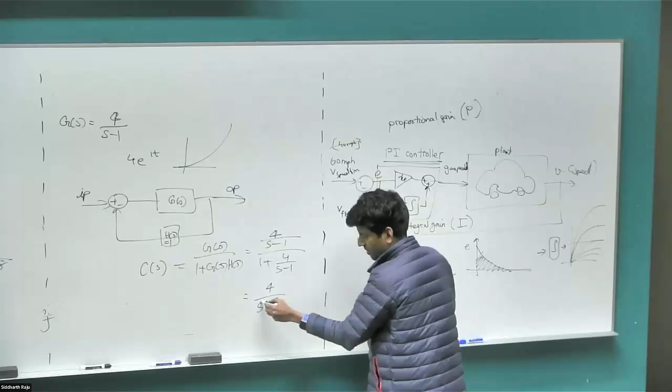So it's G of s divided by 1 plus G of s, H of s. In our case, H of s is just 1. So once you substitute this, you have 4 divided by s minus 1, over 1 plus 4 divided by s minus 1. So we have 4 divided by s plus 3. And thus we have stabilized an unstable system, right? Just by putting a simple closed loop control. Okay.

So going back to this, if I just look at this term, 1 plus G of s H of s, can this system have poles on the right hand side and still be stable? They're canceled out. If they are cancelled out, otherwise they will be unstable.

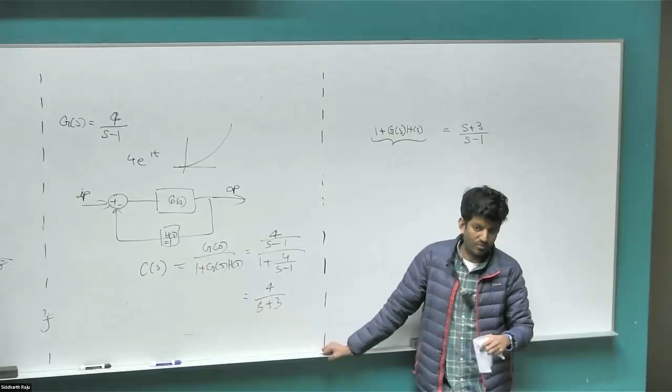So going back to this 1 plus G of s H of s, what was that here? So we had s plus 3 divided by s minus 1. So I should have rephrased it. If 1 plus G of s H of s has poles on the right hand side, will the closed loop system be stable or unstable? Can we tell anything about the stability of the closed loop system based on the poles of the denominator, the 1 plus G of s H of s transfer function?

Absolutely not. Because here, looking at 1 plus G of s H of s, it is unstable. But in the closed loop system, it did create a stable system at the end of the day: 4 divided by s plus 3. Right? Which part of this 1 plus G of s H of s do we need to look at to figure out whether the closed loop system will be stable or unstable? Clearly, the denominator is useless. In the denominator, we had s minus 2, s minus 1. But in the closed loop system, the denominator plays no role because the denominators get cancelled out, playing no role at all.

So you could have s minus 1 here, s minus 2, s minus 3, s plus 1, it really doesn't matter. Which part of 1 plus G of s H of s matters when we look at the stability of the closed loop system? The numerator, perfect. So Fiona, right? Yes. So the answer Fiona gave is look at the numerator, that's what matters. Because if you look at this s plus 3, that is what comes out as the final denominator in your closed loop transfer function, right?

So if you want to look at the stability, when you have a simple first order transfer function, you can go through the trouble of finding out what the closed loop transfer function is and looking at what the poles are and so on. But you don't even need to go through the trouble. All it says is just look at 1 plus G of s H of s and look at the numerator alone and you can infer the stability of the system. All right? Everybody clear so far? Okay. So we don't need to go through all of this math, and it's particularly useful when you have higher order systems where you don't have to solve the roots for it.

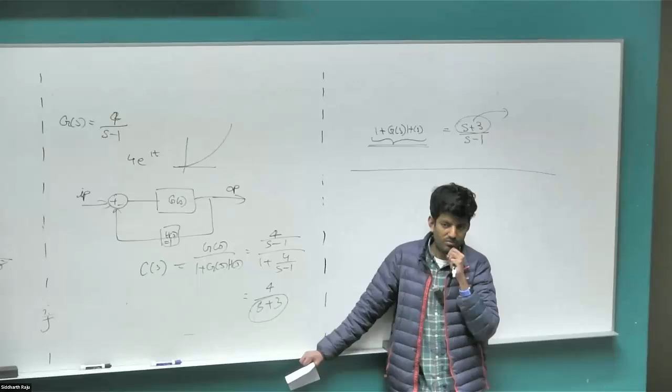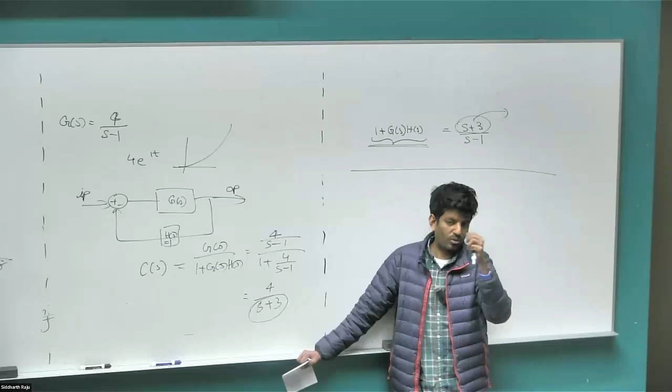Up to what order can we actually get an analytical expression for the roots of a system? Can we remember the theorem from your numerical analysis course or something? So if the characteristic equation is up to 4th order, you can get an analytical solution. After fourth order, there is no analytical solution. So if you have s to the power 6 plus s to the power 5 plus s to the power 4, and so on, you can't get a nice analytical expression. Like for a quadratic, you could get minus b plus or minus square root of b squared minus 4ac, divided by 2a. You can't get those formulas for order greater than 4. You can do it numerically and get individual solutions, but you can't get a general expression. So higher order systems become quite complicated. So we want to simplify the system as much as possible.

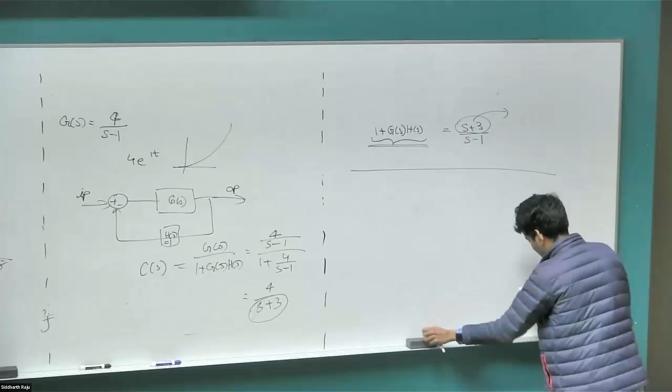Okay, so the idea is, if you look at the numerator of 1 plus G of s H of s, we are good to go. So let's look at just 5 examples. Again, those of you who have to leave, okay. Just want to introduce this so that we can continue next class. So let's say my transfer function is s plus 1, F of s, some complex system.

And what I want to do is look at the zero of this. If I plot this in the S plane, the zero of this is going to be at S equal to minus 1. Right? Now I'm going to look at 4 different spots surrounding the zero, and I want to figure out what F of S looks like.

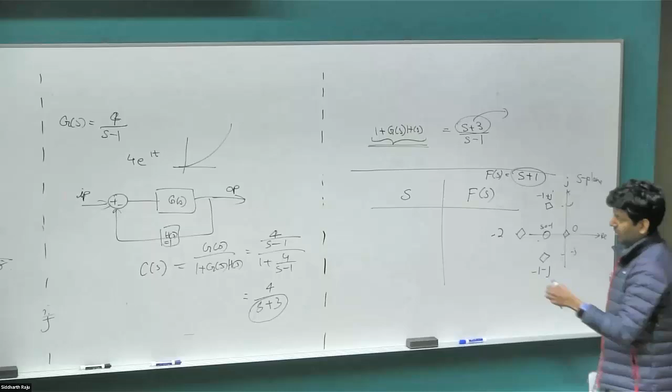So the values are S equal to 0, S equal to minus 1 plus J, right? So this is the J axis, this is the real axis. So minus 1 is here, J is here, this is minus J, and then this is minus 2, J0, and then this is again minus 1, minus J. So I want to start from this, go to these 4 points, and look at what F of S comes out to be. So let's say S is 0, minus 1 plus J, minus 2, minus 1, minus J.

For the first one, what is F of S? Straightforward, right? Just substitute S equal to 0 there, you get your F of S, that is just 1. So take these values, substitute into this function S plus 1. The second one, the value comes out to J. The third one, the value comes out to negative 1. Fourth one, the value comes out to negative J.

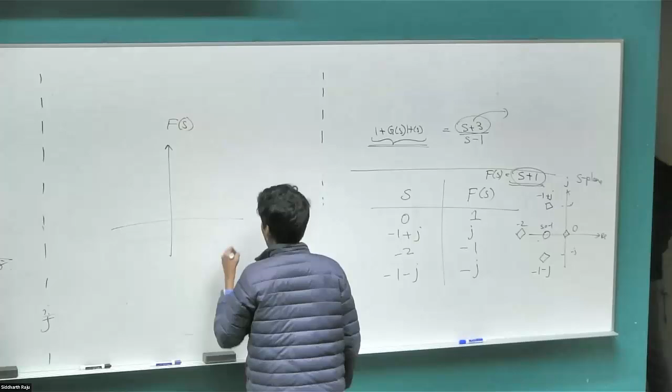So on the right, I have plotted S values in the S domain. Now I'm going to plot the values for function F of S. So this is again the real axis, this is the imaginary axis. This is the plot of values of S, that is the plot of values of F of S. And remember, the direction in which I went is anti-clockwise. So I started from this point, went to this point, this point, this point, and came back to this point. So I'm encircling this 0 in the anti-clockwise direction, right? And I want to see what curve comes out on this side.

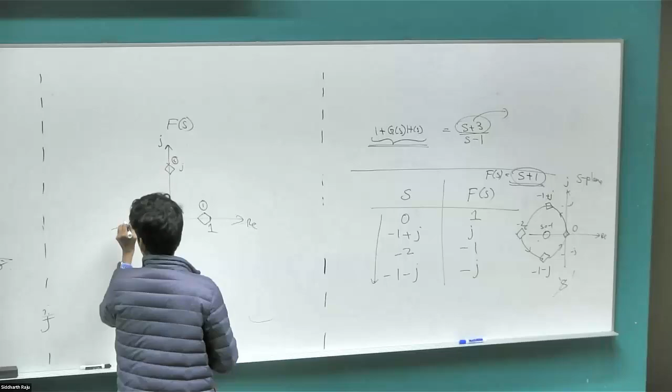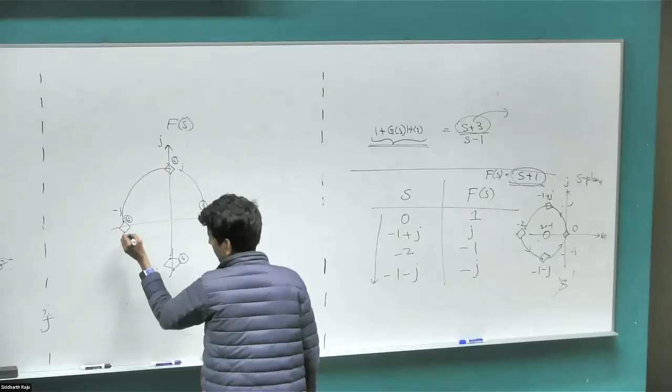So for 0, I got F of S as 1. The first answer was 1. Then we went to J for the second. So the second result was J. The third result was negative 1. And then the fourth value was minus J. So if I go back and complete this, I just took 4 points to keep it simple, but I can flesh this out with like 100 different points. I would get a more continuous distribution. And then come here, come here, come here.

So what can I tell about the F of S curve? If my S-plane curve encircles a 0, by 0 I mean the roots of the solution of the characteristic equation, which is S equal to minus 1, so my contour is encircling the 0 in the anti-clockwise direction, what can I tell about the F of S plot? It is going to encircle the origin in the anti-clockwise direction as well, right? So if I have some transfer function which has poles and zeros, and I took a curve that encloses that 0, then in the F of S domain I would get the same anti-clockwise direction, encircling the origin, right? When I look at the F of S plot.

Now, on Friday, we'll do the rest of the 4 examples, but just to think about it, if instead I had a pole here instead of a 0, how do I change this transfer function to create a pole here? Not a negative 1. If I put a negative 1, that will push the 0 to this side. What is the difference between a pole and a 0? 1 over. 1 over. Perfect, answer Jack. Okay, so the zeros are the solutions of the characteristic equation of the numerator. Poles are the solutions of the characteristic equation of the denominator.

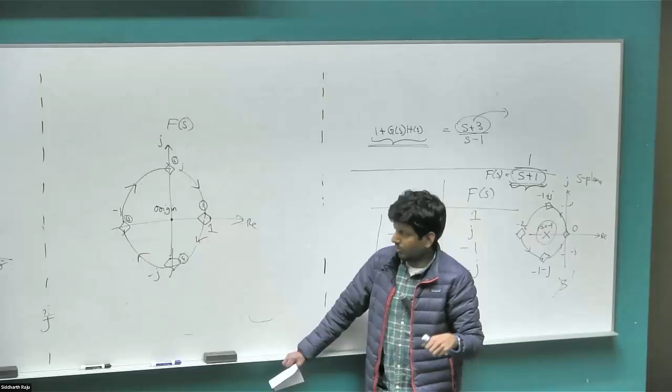So if I introduce a pole here instead, and if I do the same encircling in the anti-clockwise direction, what we will observe next class is that we would encircle the origin in the F of S plane in the opposite direction. Alright, so zeros, if you encircle anti-clockwise, F of S will encircle the origin anti-clockwise. Poles, if you encircle anti-clockwise in the S plane, in the F of S plane the direction will reverse and will become clockwise. Right? So we will look at more examples next class and then look at Nyquist stability criterion.